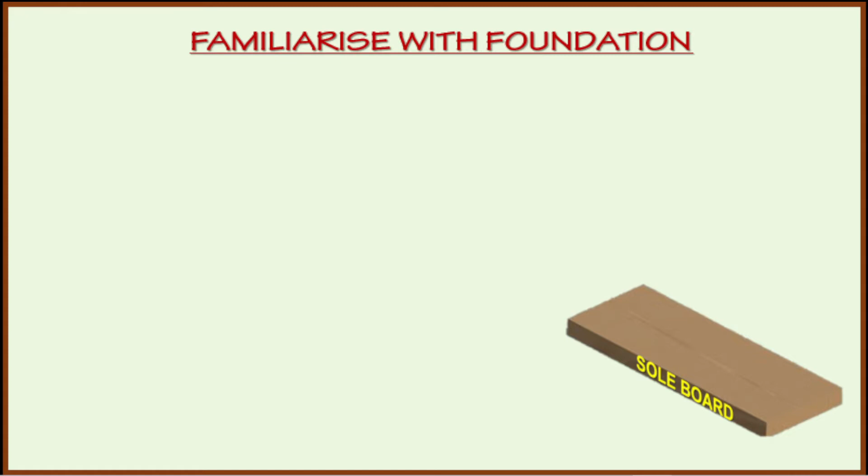Familiarize with foundation: sole board. This is the first component in making a scaffold. Over that comes the base plate. Now, there can be a sole board and a screw jack also. The similarity between the two is that a base plate is attached to it. Base plate alone without screw jack can also be used. Screw jack with the base plate also can be used.

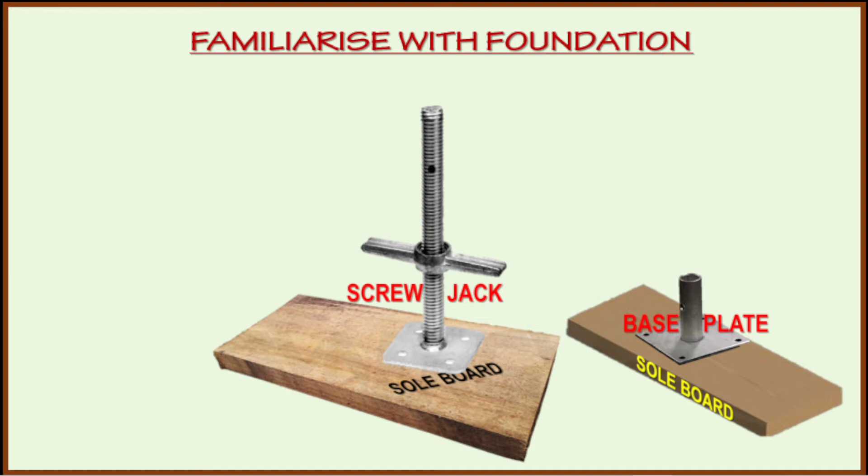In certain places, sole boards may not be used. You keep that in mind, you have to learn about it. Now one more thing is coming, that is caster wheel. So we have 3 items here: one is a sole board with base plate, another is a sole board with a screw jack, then a caster wheel. Without any one of these, you can never make a scaffold.

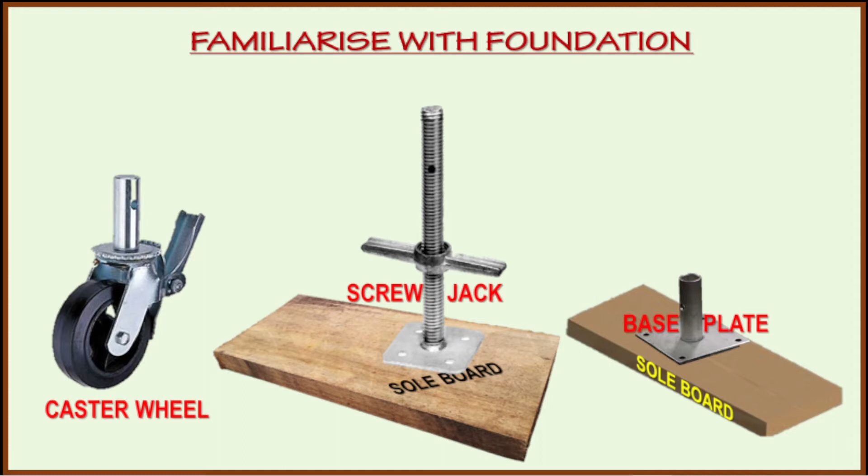Now, here is a lengthier one. In this one, we accommodate 2 base plates. The previous one, you have seen only 1. The principle is, wherever possible, the sole board should extend under at least 2 posts. There may be places where you cannot have a lengthy sole board. That is also to be understood.

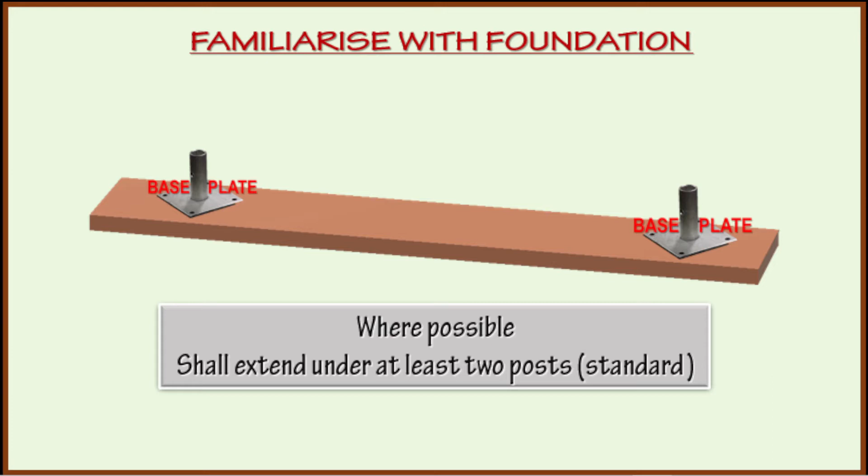Few doubts for you to clear on your own if you can: Why should we use a base plate? Why should we use a sole board and a base plate? I will give you a clue. Can you step onto a sharp nail? But the same type of nails, hundreds and hundreds, are there on a plank. Will you be able to stand on it? Of course, your answer is yes.

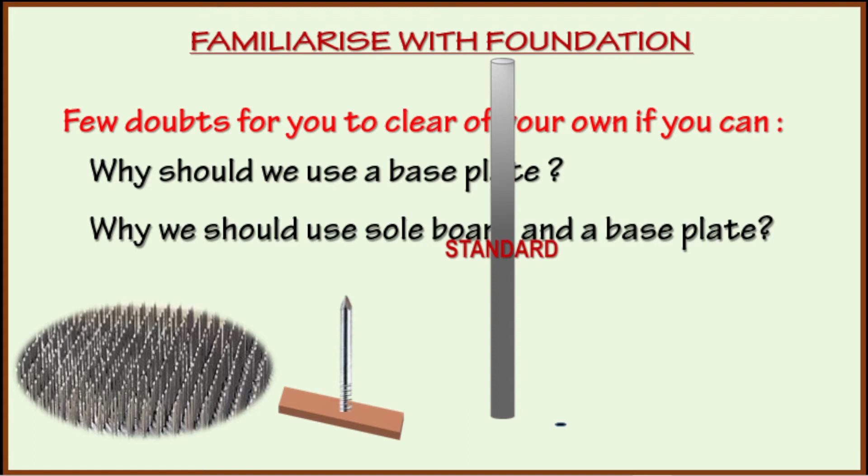Now compare. Can you have a pipe, called a standard scaffold pipe, put onto the ground directly in loose soil? If you put certain load onto the pipe, what will happen? Will it sink or not? Now, if you put a sole board over that, and a base plate, again, if you put a pipe, what will happen? You observe these things and learn yourself why a sole board and a base plate become essential in making a scaffold.

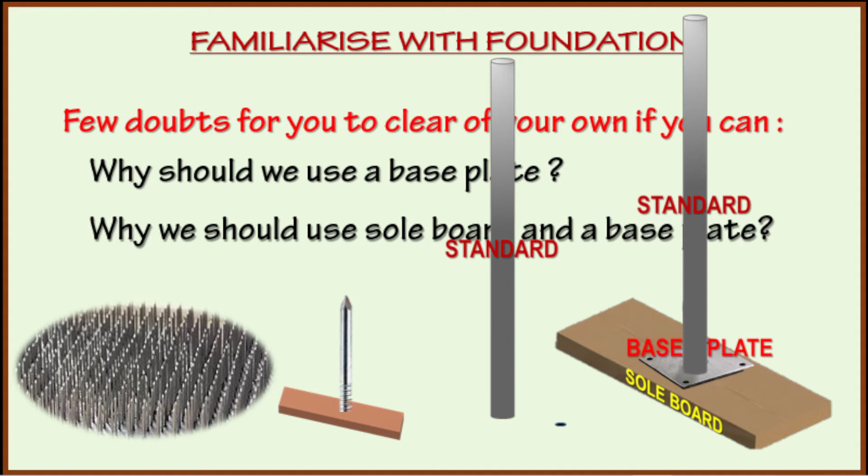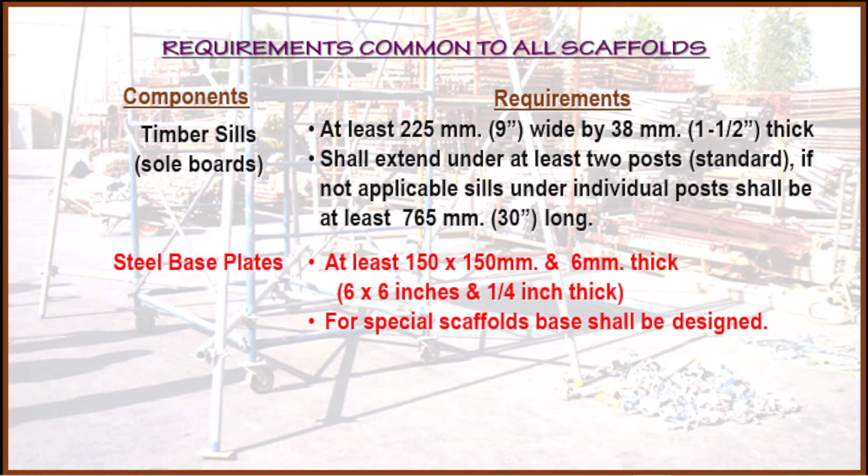Steel base plate, as it is mentioned, it is steel. Steel base plate shall be at least 150 by 150 millimeters. Nowhere does it say that it can be square only; you can make the same size for a round one also. The minimum thickness required is 6 millimeters. For special scaffolds, the base plate shall be designed by a competent engineer.

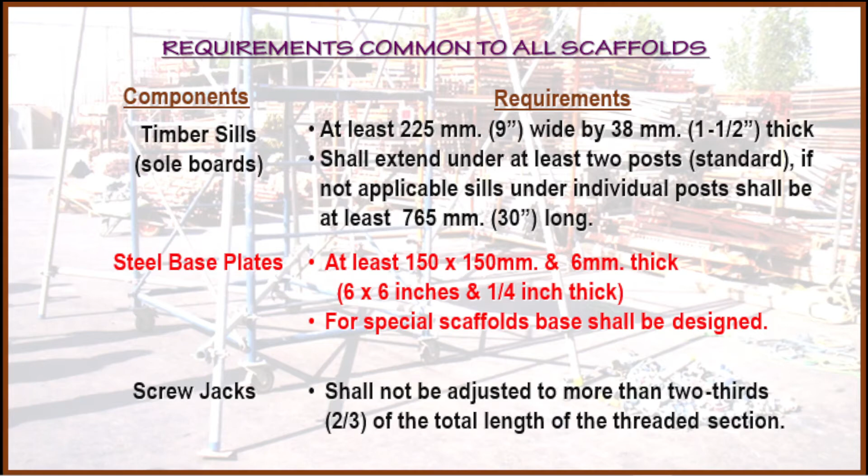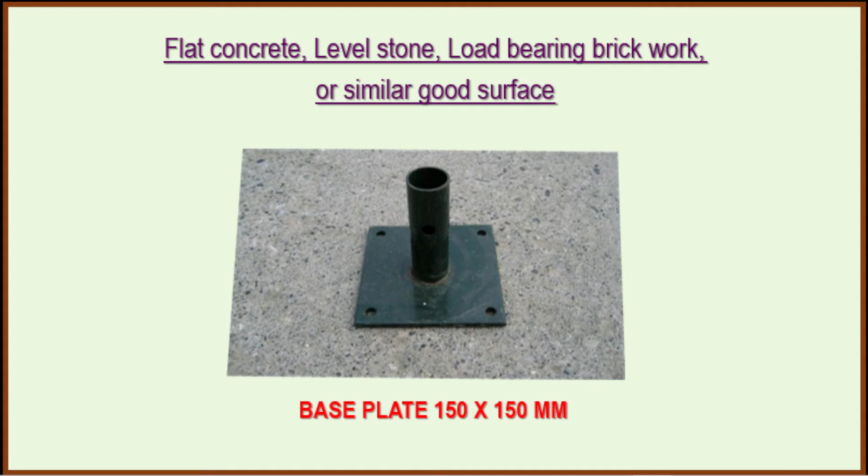Flat concrete, that is very strong floor, level stone, load bearing brickwork, or similar good strong surfaces, you don't require a sole board. It requires only a base plate. Base plate size is already mentioned, 150 by 150 mm.

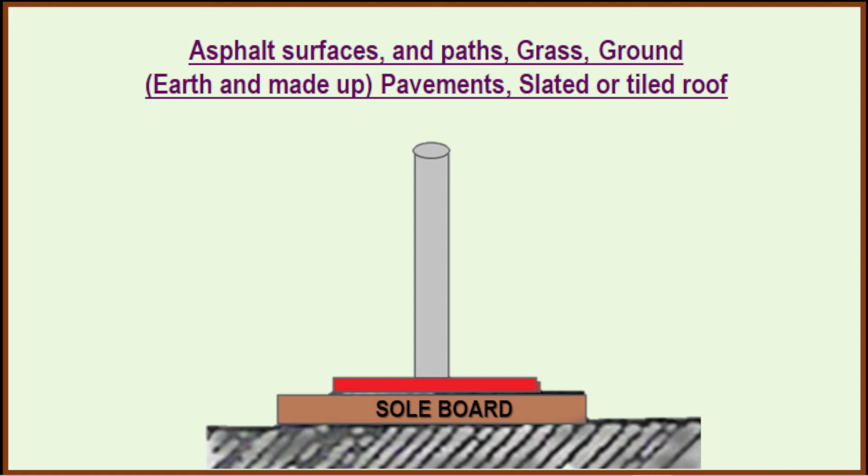Now again, if it is not so strong like hard rock, or even stone, asphalt surfaces, paths, grass, ground, earth and made up pavements, slated or tiled roof, etc., which does not have sufficient strength to bear the weight and load coming on the scaffold, you require the sole board. So over the sole board, you will be able to place the base plate.

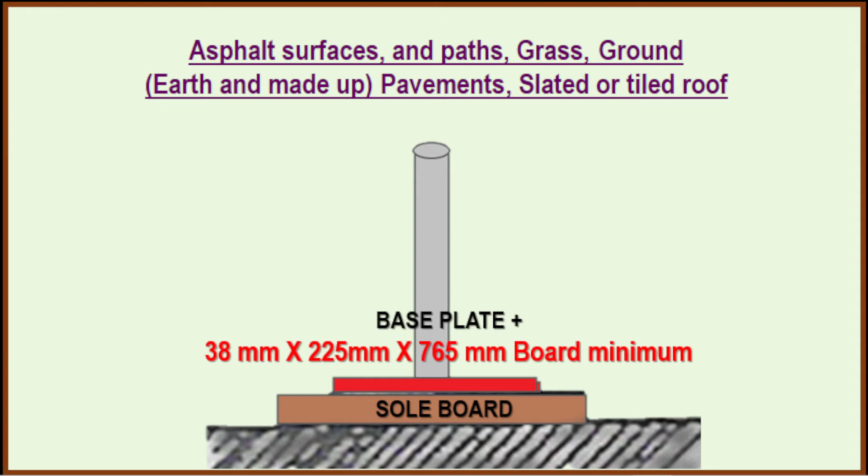The base plate size was given, and the sole board size is also given. You need not learn it by heart. By practice, you will be able to remember that. Now in certain places, it will not be that strong. In this situation, you will be spiking the base plate to the sole board such that it will not move about.

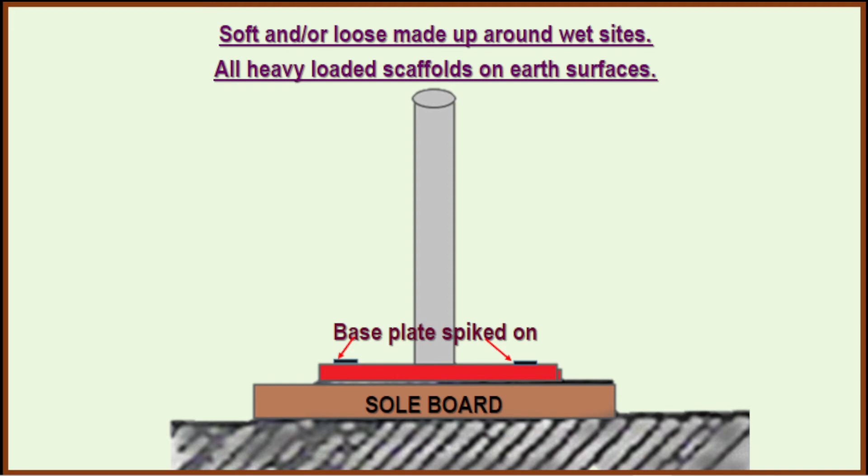Now, your floor where you are going to construct a scaffold may be very costly - costly marble, mosaic, polished wood, carpets, linoleum. You don't want your floor to get spoiled. So better put a dust sheet, at least gunny bags, hardboards, whatever it is, we call it a dust sheet pack. Over that the sole board can be placed and the base plate can be fixed.

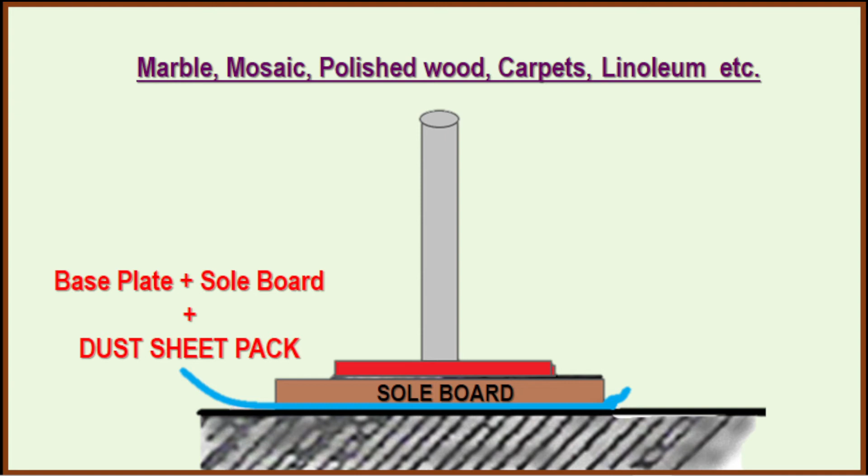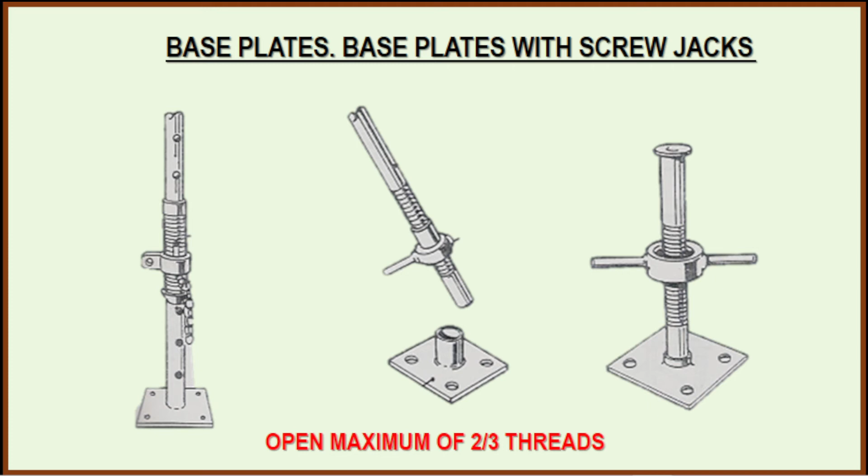Now screw jacks will come attached with the base plate or without. Whatever the make, you can expect different types and sizes. The only principle you have to remember is only 2/3 of the threads can be opened. Why do you require a screw jack? Because of the level difference in the ground. So the screw jack will be able to help us in adjusting the level for the first lift.

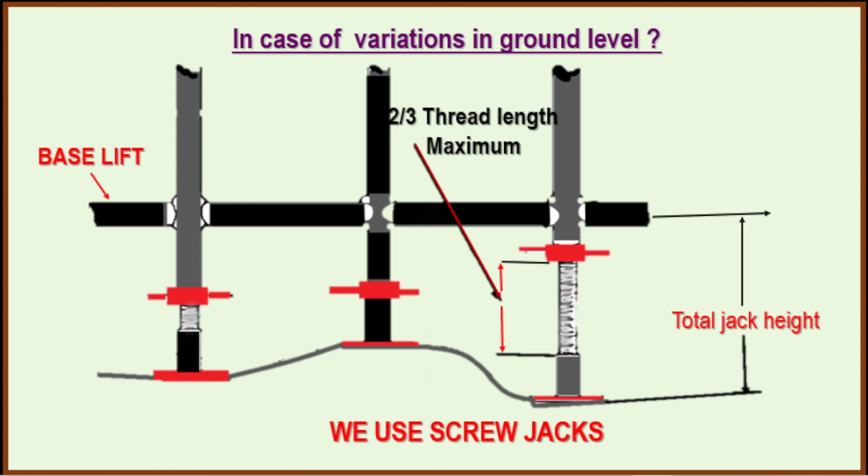This kind of slope is there. How will you adjust the sole board and base plate? The gap required is 225 mm free space plus the sole board space. This is essential.

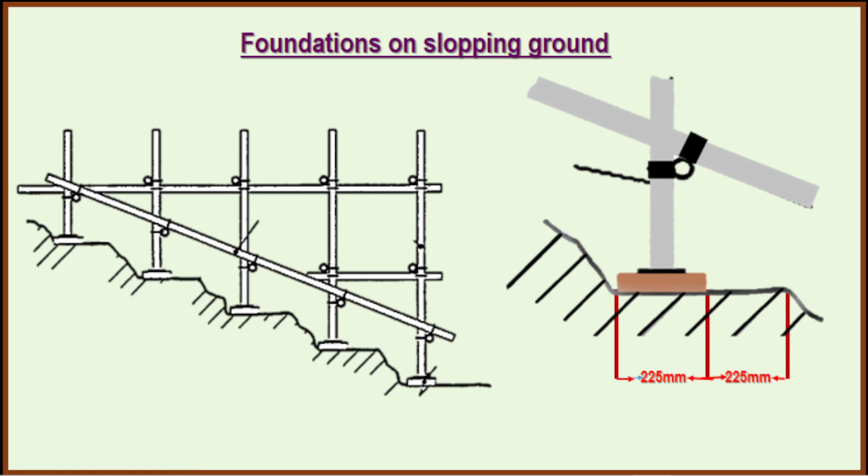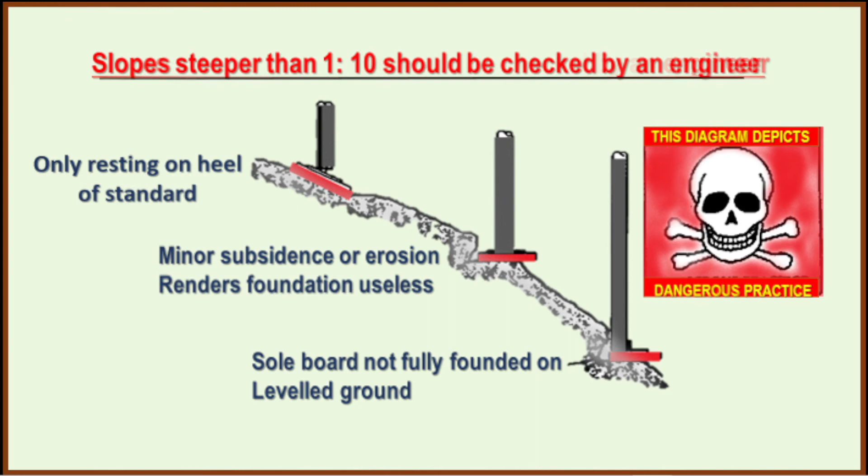You cannot have a scaffold erected like this. Absolutely, you are not supposed to give permission for this. No idiots will make scaffolds like this. Let us learn to make only safe scaffolds.

Examine the ground or floor on which we are to build our scaffold. Remember that sand or made up ground may require compacting. Make sure there are absolutely no cavities. Some floors or roofs may require supports or shoring from underneath.

On foundation, what we have to remember: it must be sound and rigid to carry 4 times the maximum intended load. What is the 4 times maximum intended load? How will you understand that? It's the entire weight of the scaffold plus however many people will be coming over that, or how much load you will be putting on the scaffold. Everything can be calculated - you will learn it in the next videos.

Allow no displacement. The scaffold once erected is not supposed to move at all. Ground surface must be level as far as possible. If mobile, casters must be locked - casters means the wheels. Base plate required on all fixed scaffolds - that means sole boards are exempted in certain cases. Screw jacks required on uneven surfaces. Yes, without screw jacks, you will not be able to level the scaffold on uneven surfaces.

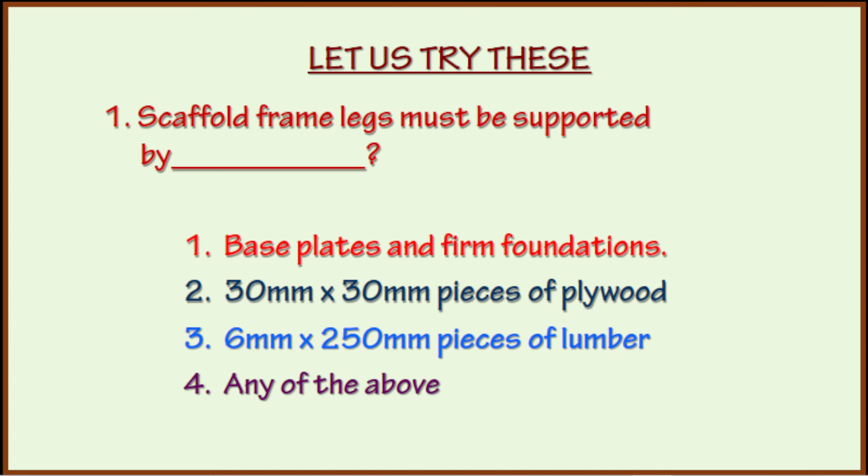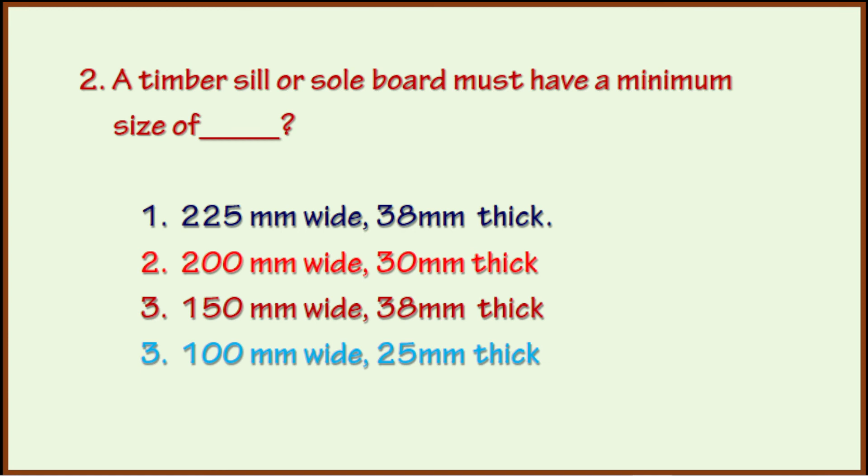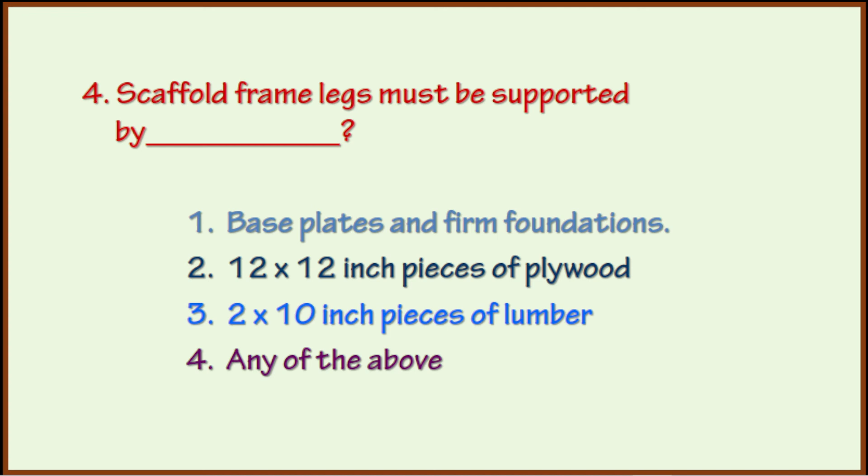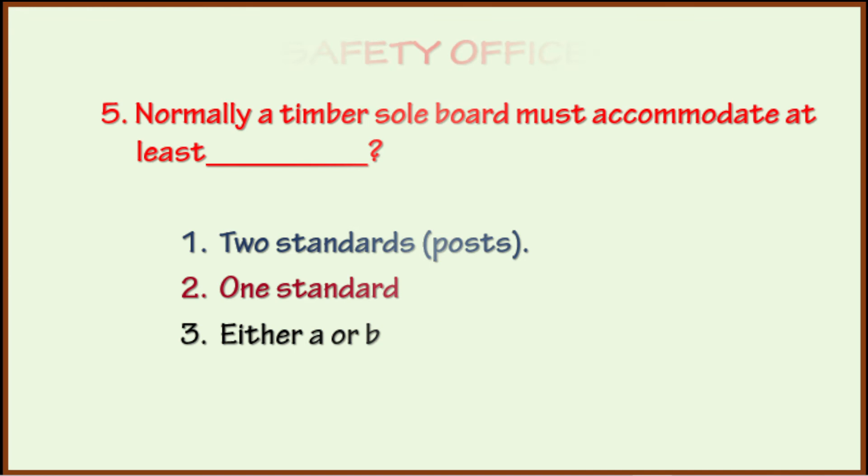Let us try this, a few questions. Scaffold frame legs must be supported by - the choices are given here, you can answer. A timber sill or sole board must have a minimum size - you learned it. A screw jack can be opened - yes, how much? You know that. Scaffold frame legs must be supported by - you know that, try. Normally, a timber sole board must accommodate at least - you are sure to answer. For you, a safety officer, ensure the crew conducted a toolbox meeting before starting work.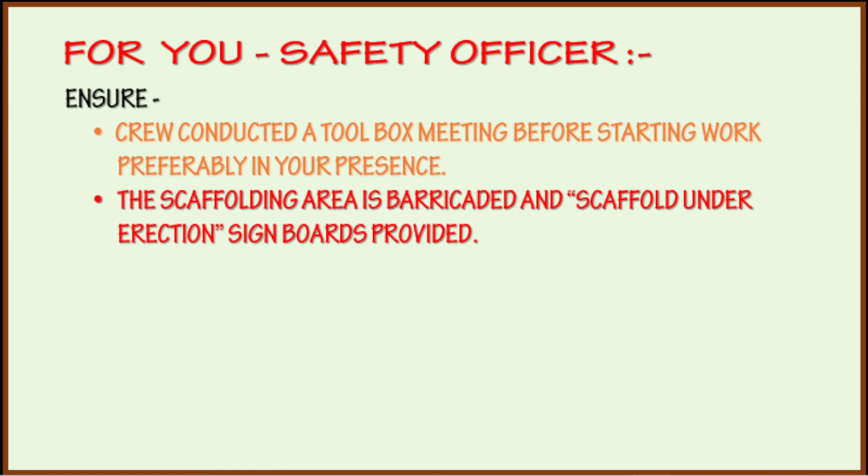Preferably in your presence - not essential, but it is preferred. The scaffolding area is barricaded and scaffold under erection signboards are provided. It is essential.

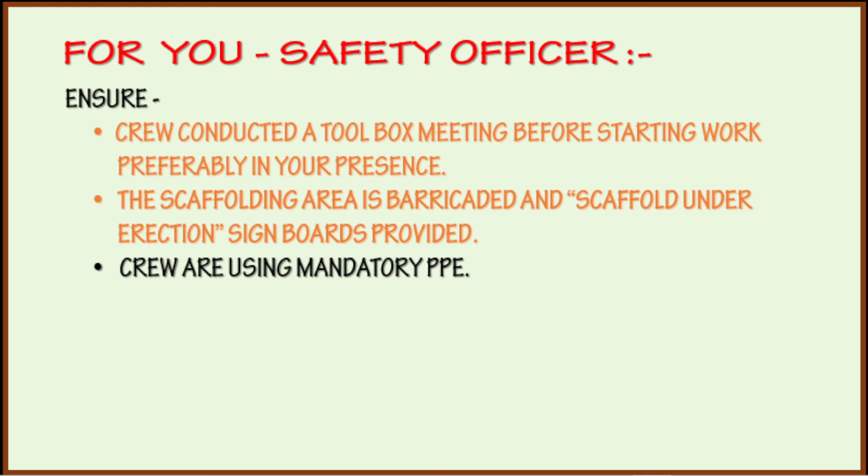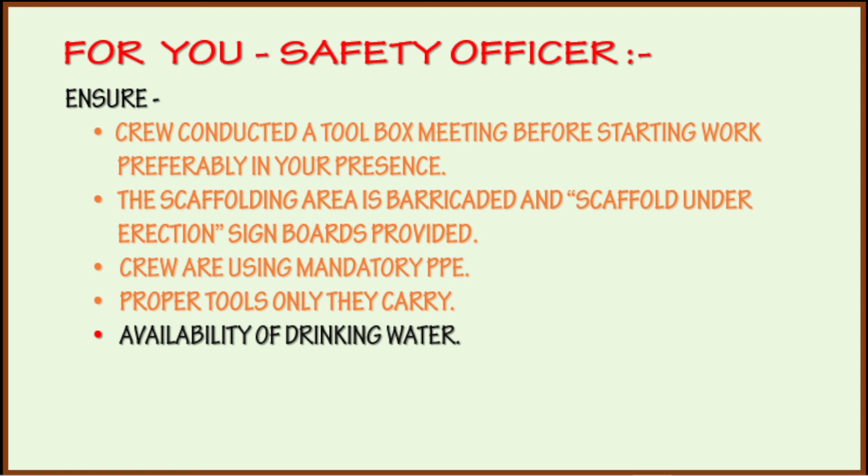Crew are using mandatory personal protective equipment - without personal protective equipment, no scaffolders can work. Proper tools only they carry - scaffolders require special tools. Availability of drinking water - scaffolding is hard work, they may have to drink water frequently.

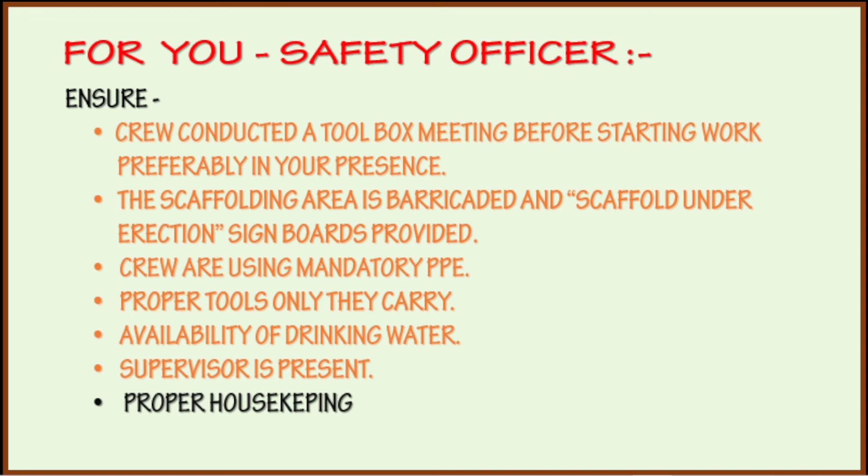Supervisor is present - without his presence, no scaffold can be erected. Proper housekeeping - that's the most important part of making scaffolds. Frequently visit the area and ensure work progresses smoothly - that is your safety officer's responsibility.

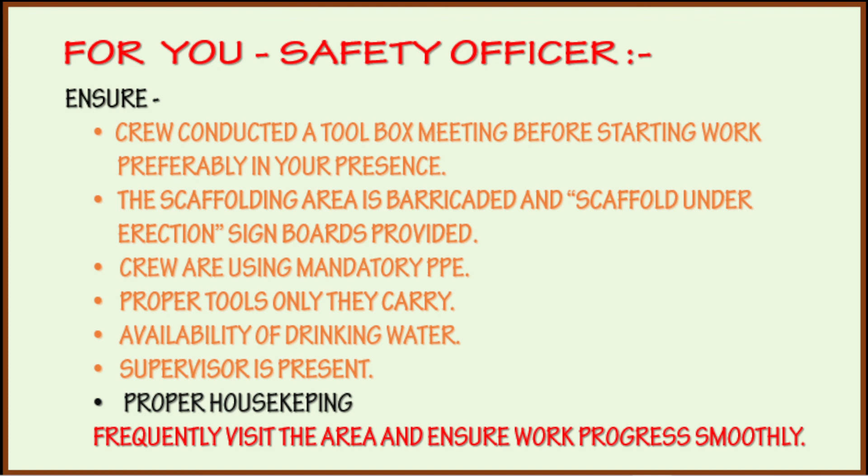Learning scaffold safety for safety officers the professional way. Next in the queue is terminology part 3.